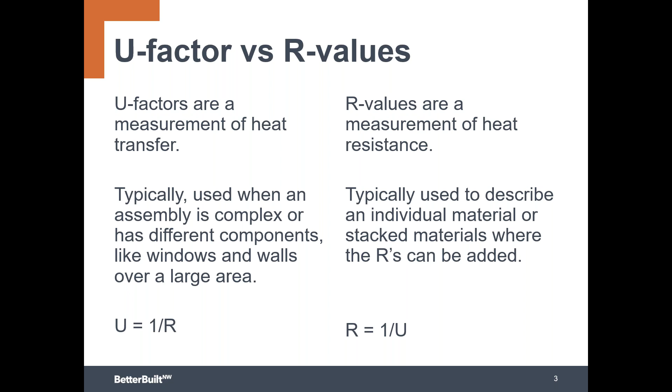R values, on the other hand, usually describe an individual material or stacked materials where the R's can just be added. So if you're thinking about a wall and want to know the R value with drywall, R21 insulation, OSB, a weather resistive barrier, and siding, you can stack those, and that is an R value—but just for that portion of the wall. Turns out U values are what we need when we're going to talk about a UA. I'll get to that definition in just a minute.

Now, I made a bit of a jest earlier about how exciting parallel path analysis is. Just for a quick refresher, series heat flow is where it's really helpful to use R values, because they just stack—no matter where the heat starts, it flows through each material the same way, so you can just add those R values. Parallel heat flow uses parallel pathways; we look at them and do parallel path analysis, and in this case we average the U values. This can work for any number of pathways.

In walls, which we're going to talk about a lot today, you could think about this as the cavity portion, where the insulation—the R21 batt or blown-in insulation—is, the framing studs themselves, and then interesting places like headers and corners, where you may have a combination of both framing and insulation.

So that was U versus R and series versus parallel. Now let's talk just a minute about UA and why this is a code metric. We can talk overall with the building about the Q, or heat transfer through a surface. In order to do that, we need to know the U value, or the average U, the area, and the delta T, or temperature difference.

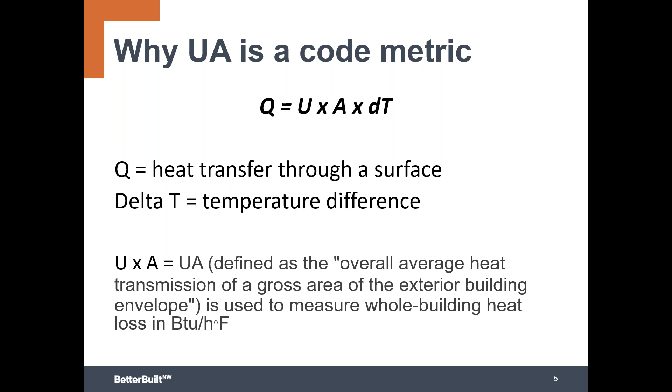You may have heard me mention ASHRAE before. What is ASHRAE? Who are they, and why are they all up in my business? ASHRAE is the American Society of Heating, Refrigerating, and Air Conditioning Engineers. And they generate what they call the Handbook of Fundamentals, commonly referred to as ASHRAE's Handbook of Fundamentals.

This covers all the basic principles and data used in the heating, ventilation, air conditioning, and refrigeration industry for residential buildings. So the Handbook of Fundamentals, you can think of that as the Bible for doing the math. How does heat move through these different types of things?

You're also going to see and hear references to ASHRAE 90.1. This is actually a benchmarking kind of platform, set to look at the minimum energy performance standards and energy codes. It provides the minimum requirements for energy efficient design of most buildings. 90.1 is most commonly used in multifamily and commercial settings, but it's sometimes referenced because embedded into the calculations for ASHRAE 90.1 is the math from the ASHRAE Handbook of Fundamentals.

So this is what we want to reference on a pretty regular basis. The IECC and most states with their own codes will say if you are going to do heat loss calculations, you have to use the ASHRAE math found in the Handbook of Fundamentals or in 90.1.

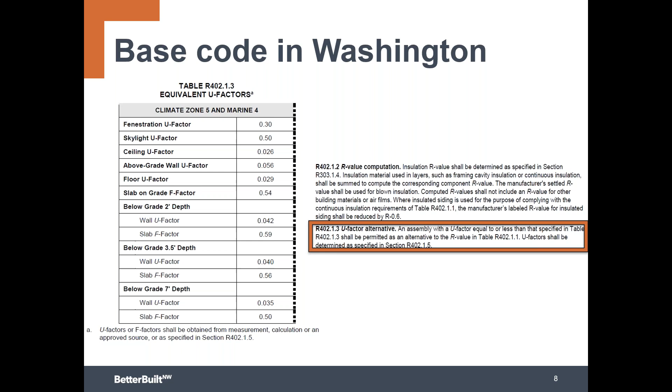Let's look at what that actually looks like. Here's part of this later chapter. If you're going to do U factor, there are some references and calculations that you're going to need to find. And look, right smack dab in the middle of there, is you need to do things in accordance with ASHRAE's Handbook of Fundamentals. This means the heat loss math is going to be very important. And here they also call out specifically the framing factors that are found in Appendix A of the Washington State Energy Code.

Framing factors, that is an overall percentage of a wall that has the insulation cavity, the percentage that has studs, and the percentage that has headers. It is very specific and different for standard framing, intermediate framing, and advanced framing of wood framed walls. It's an entirely different animal if you're talking about things like Larson truss systems or metal framed walls. We're going to stick to dimensional lumber today for the majority of this conversation because that is by and large the most common way that we see things being done in the Northwest.

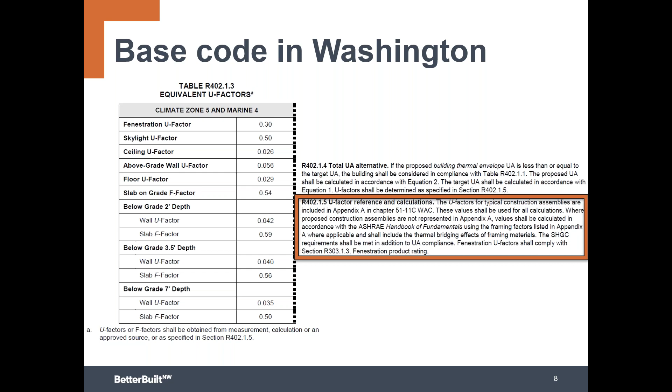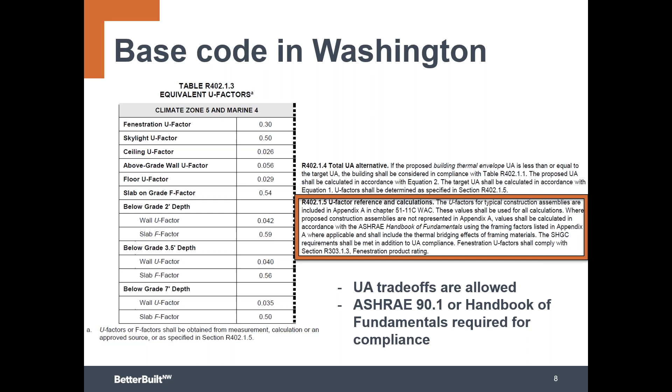So again, ASHRAE Handbook of Fundamentals is being called out specifically if you're going to do an alternative approach to a UA or U factor calculation. So overall, UA trade-offs are allowed as part of the base code in Washington, provided you use the ASHRAE Handbook of Fundamentals and that Appendix A. And don't worry, I'll show you Appendix A right now.

Appendix A has several components in it, and it covers a lot. It covers walls, it covers ceilings, it covers wood framed buildings, it covers metal framed buildings. But it does a couple of things that are really critical. It tells you your default heat loss coefficients. So what is the R value of an interior horizontal surface with the heat flow going up, or an interior horizontal surface with the heat flow going down?

So these are fixed values that you're required to use as part of your calculation. Don't worry, we're not going to make you actually search through all, oh gosh, it's hundreds of pages long if you actually go through the full handbook, all 4 sections of the Handbook of Fundamentals or the 90.1 user guide. Those are enormous books. We're not going to make you look through them all. We're going to show you the tools that you can use that are ASHRAE compliant.

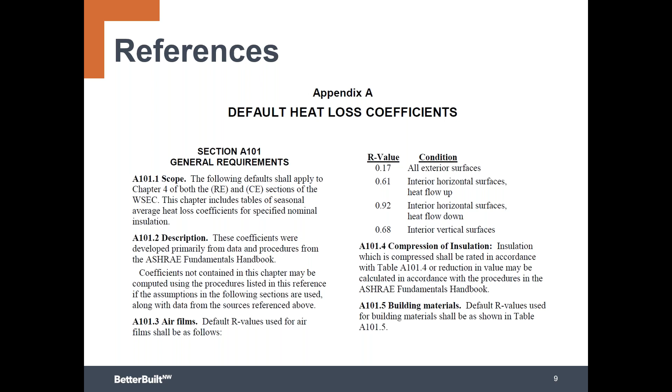So this is default heat loss coefficients. This Appendix A also provides some of these framing weighting factors. You'll sometimes hear these referred to as framing fractions as well. So when you look at this example here for intermediate framing right in the middle, on the right-hand side, it has studs and plates are 18% of an average intermediate framed wall, and insulated cavity is 78%, and headers make up about 4%. If you look down to advanced framing, you can see that the studs and plates make up a considerably smaller amount of the wall.

You just think about that for a second. If I'm putting R23 insulation in my wall and I have a 2x6 stud with an R value of about 6.8, that's a pretty big difference. I would love to have less of that R6.8 and a lot more of that R23, right? So talking about going more advanced with your framing is one of the ways to improve your overall UA.

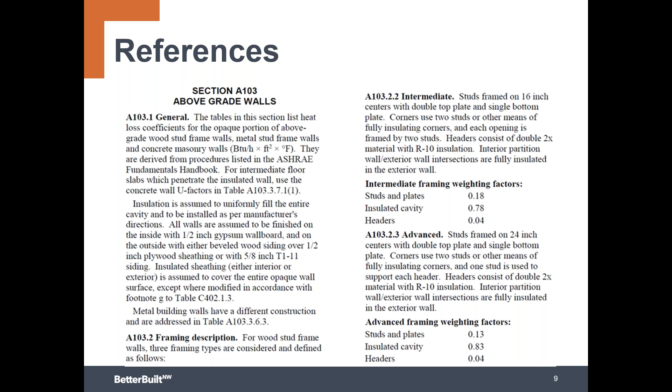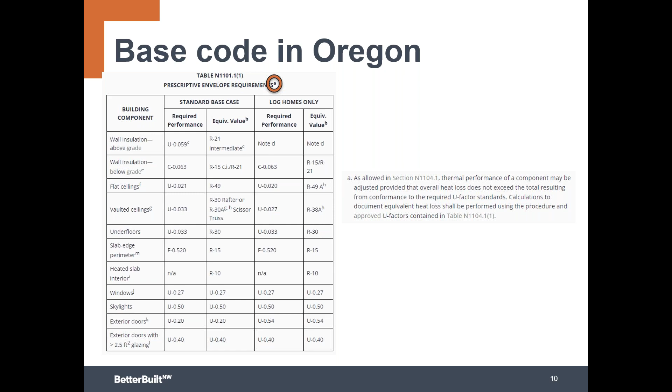Aha, footnote time. So what does our footnote have to say about prescriptive envelope requirements? Thermal performance of a component may be adjusted provided that the overall heat loss does not exceed the total resulting from conformance to the required U factor standards. What does that mean? You can do an alternative UA provided that you meet or exceed the U factor for the prescriptive table. They go into a little bit more here with a section called alternative systems.

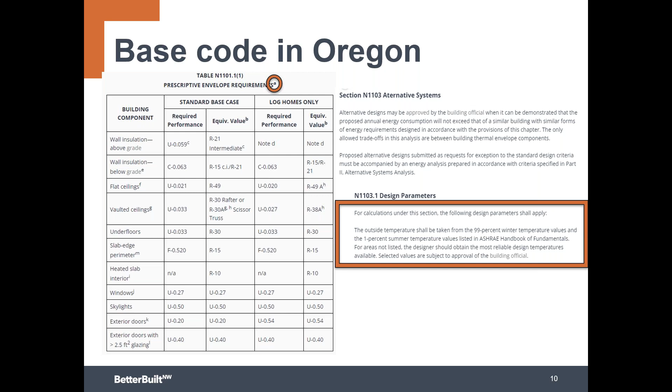And here what they say, for calculations under this section, the following parameters apply. You have to use the 99% winter design temps, and you have to use values listed in the ASHRAE Handbook of Fundamentals. So again, this is going to be a pretty common theme. UA trade-offs are allowed for the base code. You need to use ASHRAE 90.1 or Handbook of Fundamentals for compliance.

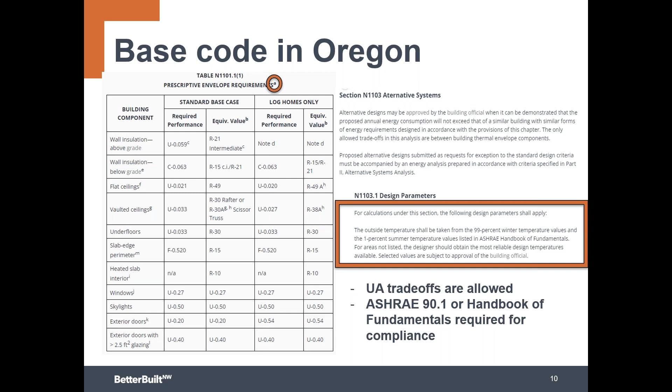Now, Oregon does something a little different than Washington does, and some other states I've seen do this as well. They actually have a table that you can print out and fill in with your proposed alternative UAs. So this is something you could actually submit as a part of your code permitting process.

So if you wanted to do something, let's say you want to have a wall that's better and a floor that's worse than is prescriptively designed, or maybe you don't want to go with 0.27 windows, you want to go with 0.29 windows. How much better would your ceiling or wall need to be to get that same proposed UA to be the same or less than the code UA? So it's a pretty handy table. Washington State does it differently, and we're going to show you in a few minutes. They have a really cool tool called the Code Compliance Calculator.

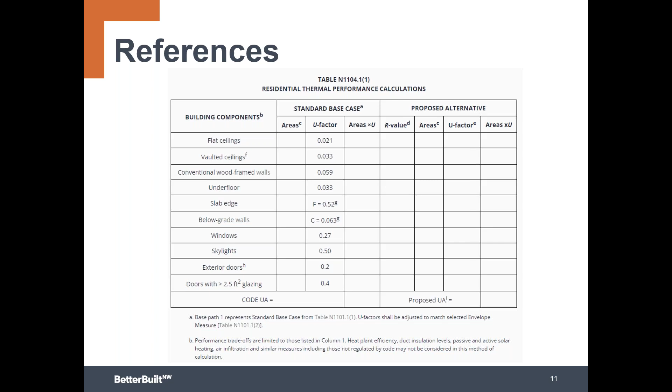So, boy, that is already a lot to go through, but we're already a quarter of the way through our presentation. So it seems like another good place to stop and see any questions so far about the base codes, how they're designed, and what they're allowing in terms of UA trade-offs. Diego, anything new? Thanks again for checking in. I think you're still just giving us a lot of really relevant information that just deserves some attention and some absorbing from the crowd. So no questions at this time.

Great. So we started with the base code, and you'll remember that I said the next set of challenges are these additional measures that these codes bring up. So Washington State has this table called 406.3. This is their energy credits, as it's often referred to. Sometimes it's called the energy points table. And within the efficient building envelope option, or option 1, there are several options that allow for UA trade-offs as a way to comply. So option 1.3 gives you a prescriptive way to meet it.

You could do windows at U of 0.28 and a floor of R38. Or you could use compliance, as we described earlier, and reduce the total UA by 5%. The same is true with 1.4, 1.5, and 1.6. They're increasingly more stringent, but they give you more points or more credits. And in Washington State, on average, you need 6 credits to comply with the energy code.

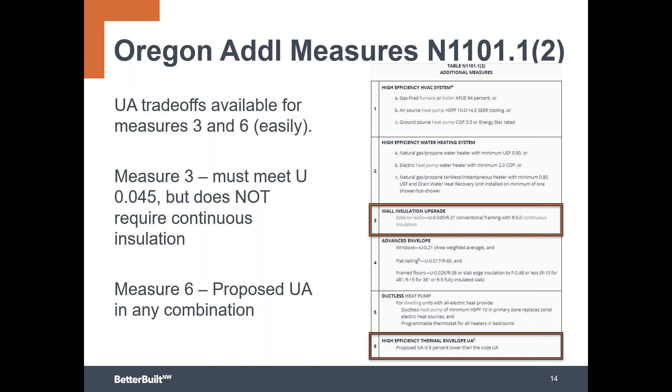Alternatively, you could look at the overall high efficiency envelope for Oregon and get your additional measure by getting your proposed UA to be 8% lower than the code UA. Now, again, don't worry, you don't have to do all that math yourself to compare the two and see, am I at 92% or less? We've got a calculator we're going to show you in a minute that will do all of that for you. So we've now covered the prescriptive components and the additional measures for Oregon and Washington. Seems like a good place to pause again and check to see if any questions have come.

Definitely a great place to pause, Dan, as we got a first great question in here. This is specific about one particular calculator this asker is using. This person asked that they are using the 2021 ORSC additional measure number 6 calculator, and they were curious if this is an effective tool to show a percent above the base UA code. That is a great question, and in effect, it does do that, and we'll get to that in a minute. But again, it's only applicable to Oregon. We'll actually show you the example of that in a few minutes. Actually, we're going to go through building a custom U-factor assembly first, I think, and then we'll jump into it.

This calculator is allowed to be used for 2 things: overall UA trade-off or compliance with measure 3, 4, or 6 from the code. It is not designed or connected to any programs like Earth Advantage, Built Green, or the EPS new construction offering. With those programs you may be able to work with a home certification program, but effectively a utility program is not going to be designed to use this. Those programs instead use the energy modeling approach that I talked about a little earlier.

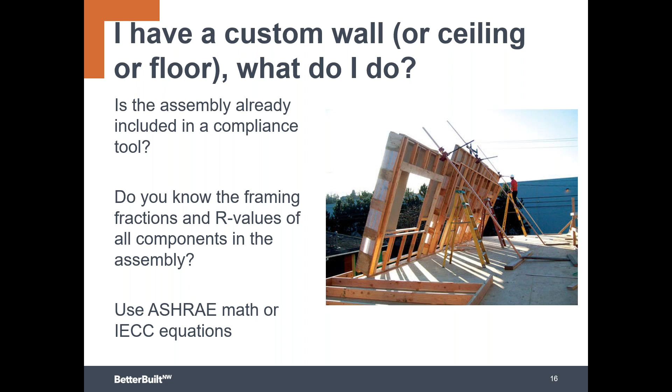So start there. We're now going to walk through some examples of these compliance tools, and then we'll go through some available calculators in the marketplace. And I know that there's more out there than what we're going to show today. I just went through 3 or 4 that were easy to find and easy to reference. So you could build your own custom U factor, overall U and UA, using some of these market-based tools and then put them into these calculators. But let's start with the calculators, because again, the first thing we want to do is say, is it in the code or is it in the compliance tool itself? So let's start looking at these compliance tools.

First, always, if there's an option to click on the README or instructions link, I mean, it sounds like a no-brainer, but this one is a little nuanced, so you definitely want to do that first. Read the README tab. Then you actually will right-click on the Code Compliance Calculator and click on Open in a new tab. This is going to automatically download the C3 workbook to your computer. Now, I want to be very clear, this is an Excel tool for Windows only at the moment. So it doesn't work with Google Sheets, and it doesn't work for Excel on Macintosh yet. That may be a further iteration in development, but for now, it works for Excel, for Windows, and for Office 365.

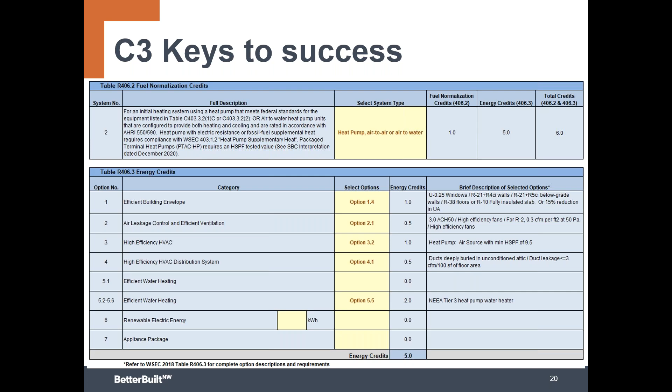And this is just an extra helpful thing. It's going to do a couple things. One, it's going to give you your total credits, and this is a compliance possibility to submit this to your code official, so they actually know that you're meeting the code. But by selecting option number 1, efficient building envelope, option 1.4, this is automatically going to pre-populate in the background what you're comparing your proposed envelope against.

And then you go in here and you're going to add your size of your house, your conditioned floor area. I just picked 2,250 square feet, kind of a very average size in Washington and Oregon. And it automatically knows in Washington that that's a medium-sized dwelling. Washington State, there's different credits needed for small, medium, and large. So if you do those 3 things first, you've set yourself up very well for success.

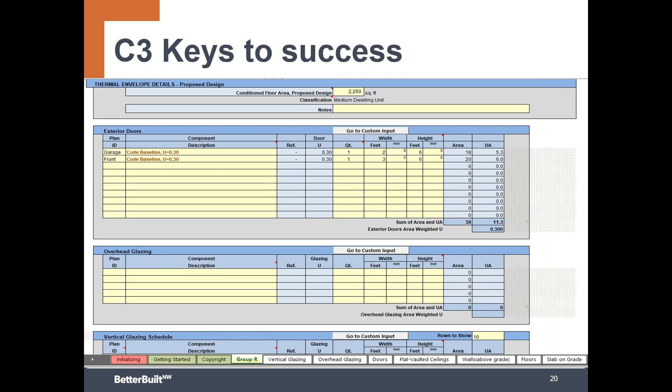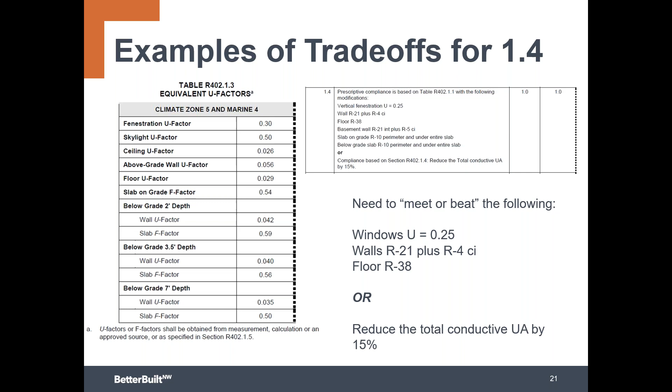So let's take a look at an option for this. So on the left, let's take a look at this package. We've got the windows, the wall of continuous insulation, and an R38 floor. That gets you to 15%, or to do 15% reduction.

Maybe, however, you're looking at this, you're saying, you know what, we're just having a really hard time, whether it's cost reasons, training reasons, or sourcing materials reasons, we're just not yet ready to move to continuous insulation. So what if we looked at a different package? What if we looked at R23 blown-in insulation, even at 16 on center, we're not even going to advanced frame, but we're willing to do an advanced frame attic. This typically means an energy heeled truss with R60 in it, and we didn't change the windows or the floors. Would this get us to where we want to go?

So I put all of this into the code compliance calculator, and you see right up at the top, UA reduction, proposed UA is better than the baseline by 16%. So UA reduction meets the selected option of 1.4. So congratulations, by putting that in, that actually worked very well.

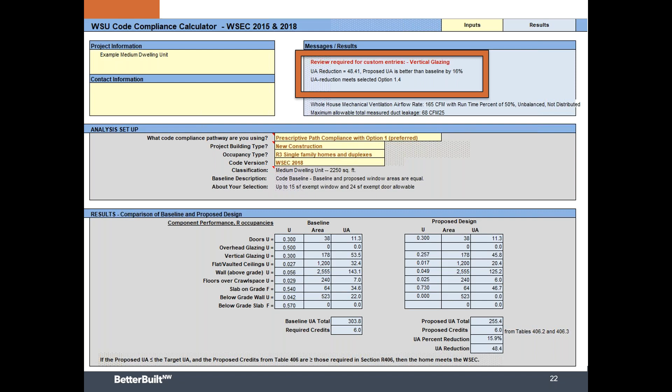Let's take a look at another option really quickly. Maybe in this one, we've got a couple of things going on. Maybe our insulator says, boy, Jeremy, do I have a deal for you. We've got these crazy R20 batts from Germany. They're almost like magic, and I got a really good deal on them. I know that's not standard, but we can get you this, and maybe we can do that with R3 continuous, a half inch of insulation.

That's a lot easier to get over that hurdle on cost and training with my crews. And if we do something like this, we might be able to back off those 0.25 windows and go with the 0.28 window. We should run this and see if this will qualify.

Well, the problem is when we open this code compliance calculator, there isn't an option for an R20 wall plus R3. So I can go down here. If you look at row 920 or index 920, I've created my own entry here of R20 cavity insulation plus R3 continuous insulation. And I had to put in a custom wall U value.

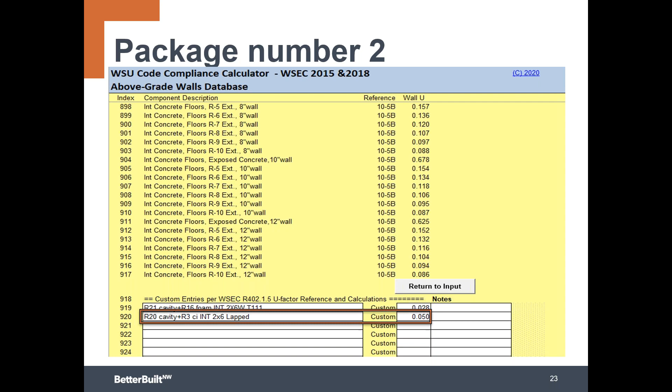And we'll get to that in just a minute of how we actually did that. All right, so I've got a custom wall U value of 0.050. So let's take a look at that, and congratulations again.

This is 18% better, it does qualify. You'll see this red thing up top - a review required for custom entries, both vertical glazing and above grade wall. So now a code official knows someone's done something custom. What I entered here was a custom sliding glass door plus a custom wall entry, which may trigger a building code official to take a closer look. Let's take a look at how you got your 0.050 for your wall action.

By the way, you can also change this view. Instead of looking at option number 1 preferred, you could instead do a total UA whole building trade-off analysis. This has some different assumptions in the background - maximum baseline window area is 15%, so it basically fixes your baseline window glazing. If you want to do a whole building UA trade-off, the less glazing you have, the better it's going to look. That glazing percentage trade-off would not apply for the envelope-only option, but for envelope 1.3, 1.4, 1.5, 1.6. For a whole UA trade-off though, it would.

And I'm looking at this, and vertical glazing exceeds 15%, so you get a little alert there. But this does show proposed UA is better than baseline by 13%. The good news is that it's better, so it qualifies as a total UA alternative, but it probably would not have qualified for 1.4. So I'm going to pause again and see if there are questions before we dive into Oregon's tool.

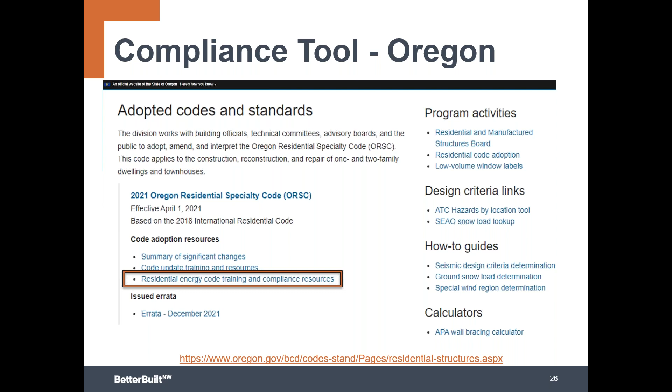Once you get to this page, again sorry for the speed, you'll get to compliance, the Adopted Residential Energy Code in Oregon, and here's the Measure 6 Thermal Performance Calculator. It's kind of ironic that both Washington State and Oregon have these really great calculators, and neither one is called a UA Tradeoff calculator, which would have been helpful and handy probably, but that's okay - everyone has their own reasons for the way they develop them, who am I to judge. But this is the one you want, the Measure 6 Thermal Performance Calculator.

So let's take a look at what this tool looks like. Here's a snippet of it on the right, and again there's an instructions tab - definitely read the instructions. It's designed initially for Measure 6, but you can also use it for Measure 3 and Total UA Tradeoff. Now, I mentioned earlier that there is sometimes language that seems confusing. Right here it says for demonstrating compliance with additional Measure 6 only - that's actually not quite true. That's just this little box at the bottom where it says pass or fail, and that pass or fail is only applicable to Measure 6.

You can still use this for Measure 3, Measure 4, or Total UA Tradeoff. You just have to be very clear about what you're looking for when you do that. This pass-fail won't give you a pass until you're 8% better, which if you're doing a Total UA Tradeoff, you're probably not going to be. So that's a bit of a conundrum, and I apologize on behalf of the universe that it's not more clear, but that's why I wanted to spend a couple minutes on this. This calculator can be used for these other measures, it's just the pass or fail isn't really something you're worried about unless you're doing Measure 6.

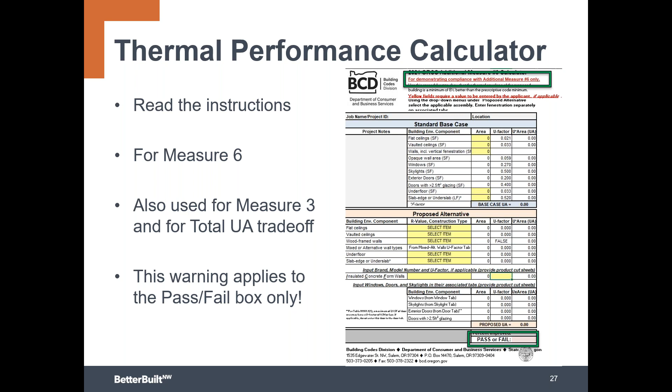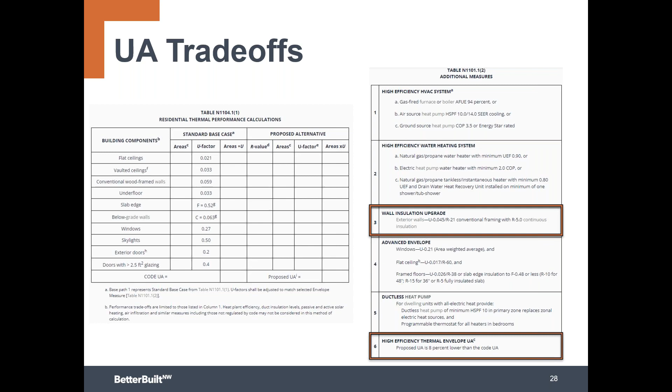When you start with this, the first thing you'll see is the top half of the calculator, which is the standard base case. All of these yellow boxes are places where you can enter data. Again, I've got a 2,250 square foot house, about 1,200 square feet of ceiling area, about 1,200 square feet of floor area, and I did the math on my walls and got 2,555 square feet of wall area.

Now let's take a look at some UA Tradeoff opportunity. Remember, the prescriptive base case is windows at 0.27, R21 intermediate framed wall, conventionally framed R49 attic, and a floor of R30. What if I wanted to get Measure 6, meaning 8% better? What if I kept the windows at code, kept my R21 wall, but added a half inch of continuous insulation, and went to R38 in my floor? Maybe I'm building in both Washington and Oregon, so I'm already doing it in Washington - it's silly to have to order different products in the state next door. Would this get me that 8%?

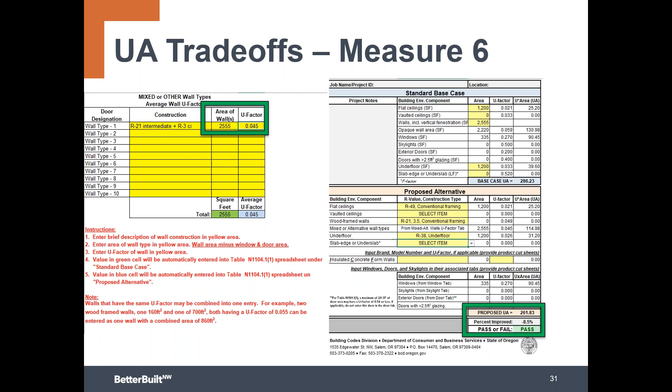So good news, this calculator is actually pretty easy to use. You could also use this for overall UA tradeoff. Let's say I'm looking at windows and finding it hard to get 0.27 windows at the cost I want on both sides of the mountains in Oregon - maybe they're easier to get in Portland and Eugene than out in Bend. But I can get 0.29 windows just about anywhere. So maybe I could say, what if I did 0.29 windows but R23 in my walls? What's that going to look like? Well, I go in and change my windows to 0.29.

And I've got to say, geez, look at that. Even without R3, just with the advanced framing, I actually looked at the base case UA and the proposed UA. The proposed UA is better, so that qualifies for overall UA trade-off. Remember, we don't care about that pass-fail for overall UA.

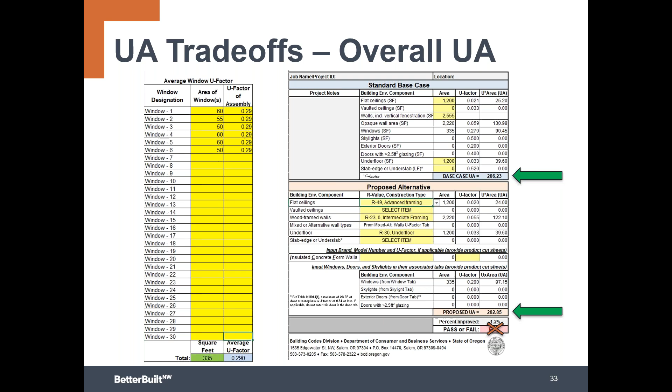That's only for measure 6, where we're looking to get 8% better. Now, I know that was a lot, and I know I went fast, so I want to pause and see what kind of questions we have before we get into tools for calculating custom U values.

Thanks for taking a pause, Dan. We did have one specific question that's specific to Washington. They have a scenario they wanted to run by us here. They have a 500 square foot basement addition added to the whole house alteration. The floors are increased from 2,200 square feet to 2,700 square feet. They wanted to know if C3 will handle this combination calculation.

It's an excellent question. The version posted on Monday on the WSU website is not yet capable of this, but I was able to talk to Carolyn Roos, who oversees this, and she sent me a custom version that we think will be uploaded this week, and it absolutely will be able to do this. It gives you an entirely secondary set of inputs that you can put in, and this allows you to handle additions and renovations as well. So you can have different square footages between the two, and you'll be able to do a lot more with the tool very soon.

So the initial version was to cover the base case for most new construction options. They're absolutely able to do additions, renovations, and existing buildings, all that kind of stuff, with the new tool that could even be uploaded as of now. It wasn't yet on Monday, but we think in the next week or so it should be uploaded, and it's pretty terrific.

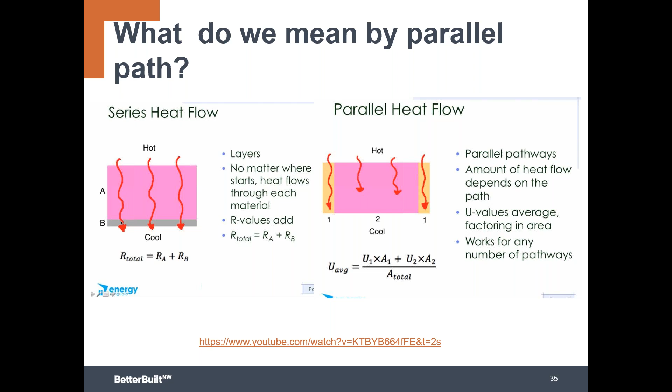You don't need to do that anymore because there's a bunch of cool tools out there. Applied Building Tech and Building Science Advisor are two pretty cool tools. They are capable of doing some of this. Now, they're not going to be as nuanced as some others. This will allow you to do a parallel path, at least for framing and body of insulation, but maybe not including the headers because they're just not that nuanced.

If you were going to use one of these to do a custom UA or U value to put into one of those UA calculators, you're going to want to do screen captures or something. The Building Science Advisor is great because once you enroll, you can save every wall that you put in.

So you could PDF them and send them along as part of what you're doing. It's a pretty cool tool, and it's free. It also has this other cool thing of moisture durability and performance. You can put in what climate zone you're in, and it not only tells you how you're doing against code, it tells you how you're doing with moisture and durability.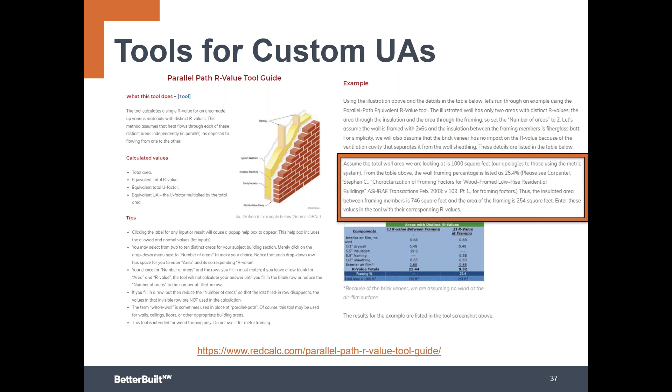Now, some of you are saying, that's great, Dan, I'm already neck deep in this tool called REMRate that I use for energy modeling because I'm a HERS rater and I want to do this kind of work. And I also want to provide tax credits and utility incentives, HERS scores, and Energy Star. Can I use REMRate to do this?

So you can make this wall less resistant to heat loss, or more conductive for heat loss through it, by changing the grading. You can't make it better, but you can make it worse. Everything else that's not part of the grading is done in accordance with ASHRAE Handbook Fundamentals.

So you definitely want to have a copy of this ANSI standard, RESNET ANSI ICC 301-2019, if you're going to be using this, so you can share this with your permitting official so they have that confidence that this is being done properly.

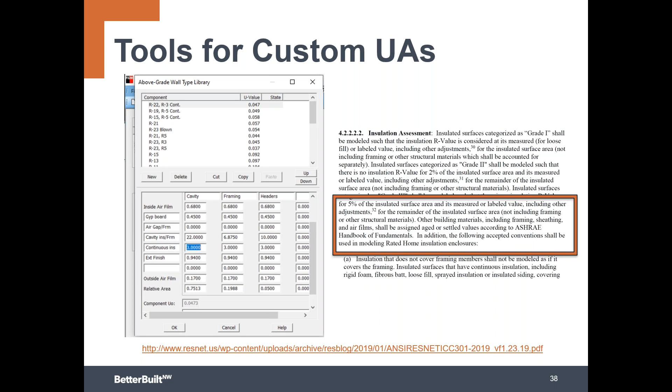Now, with all that being said, one of the big questions we get asked is, will I get the same answer if I build the same wall in a bunch of different tools? The answer is kind of.

How is that possible? Well, remember that the REMRate tool allows for a parallel path with the stud, the cavity, and the header. You may remember I mentioned these other two didn't have the ability to do header. They only had to deal with the dimensional lumber, is it 2x4, 2x6, or 2x8, and its spacing between them. So when you look at different tools like this, that's some of that nuance.

They also maybe have different thicknesses of some things like the OSB. Is everyone using the same OSB thickness, the same drywall thickness in their assumptions? So you really do want to check these out, because you can get slightly different answers from 0.047 to 0.049 for basically the same wall.

Again, the REMRate one is more nuanced. It allows for more data points of entry, but it's also really easy to mess this one up, because you can adjust the framing fractions yourself, which I don't recommend doing if you're doing this for code, but you could do that. People can, I don't want to say cheat, but they can accidentally enter the wrong piece of information and get a very different number. But REMRate is infinitely more flexible than these other two tools, though these other two tools are giving pretty similar answers. And the answer could be 0.0484.

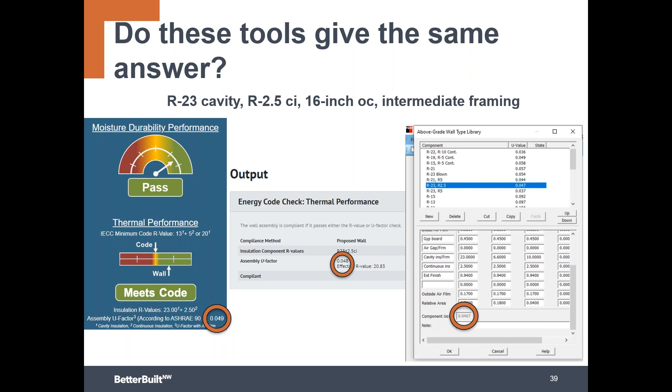I didn't even mention the C3 calculator will automatically calculate your necessary ventilation rate for Washington State. And it allows you to put in some inputs on the design, whether it's balanced, supply only, exhaust only, is it distributed, and will actually tell you how much ventilation rate you need. It also has a code-based block load heat load calculator built into it.

So on the C3, you can do an awful lot with that. You can show UA tradeoff compliance, you can show compliance with your energy credits, you can show your ventilation compliance, and you can show your compliance with your heat load calculations, all in one tool.